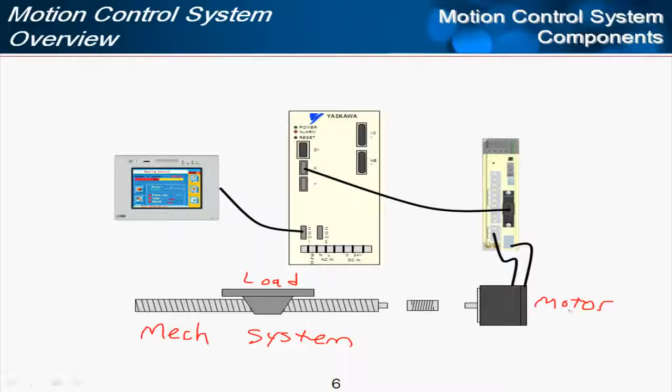The most important component in many aspects being that of the load, and what we'd call in this case a ball screw, a belt, any type of mechanical system. But the load can't move by itself. We have to have a motor, a servo motor in many cases. But the servo motor also can't move by itself. It has to be driven through a drive.

This servo drive is often referred to as the amplifier or amp. And Yaskawa has a name that we'll put on the front of ours called Servopack. So these terms are all synonymous in the motion world. You'll often hear the word servo, and the servo can be referring to the motor and drive, sometimes together or separate. And one common, you might call it mistake, is to call this drive the controller.

And in a sense it is controlling the motor, but the controller, or the logical controller, the PLC, is a separate system. And so I'll call this the controller. The drive just takes a command and makes the motor move as commanded. The controller is what makes the decisions and decides what that command should be.

Now, over the years, different manufacturers have done things to combine the controller and drive into one package, or to combine the drive and motor into one package. Yaskawa has done this. We've got an MP2600 IEC, which puts the controller together in one package with the drive. But really, no matter how you look at it, we still have these distinct components, whether they're in the same package or not.

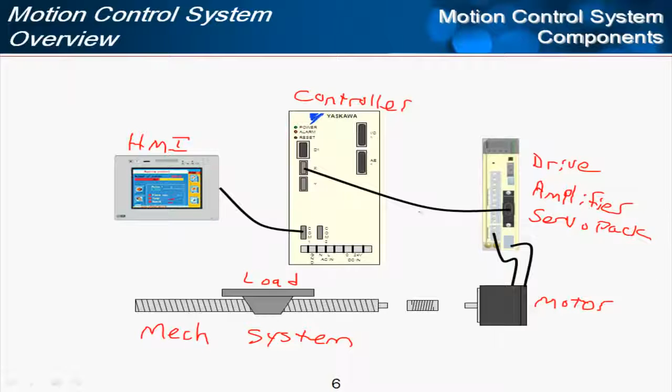And finally, here the user interface, we'll call the HMI, the human machine interface. And that could be a nice panel like this, or it could simply be switches and indicator lamps. And then this HMI is used to access and perhaps change different parameters in the controller so that the controller can change the way it commands motion to the drive and hence to the load.

So let's start by looking at the controller, because the controller selection often determines the setup and configuration of the drive system. The controller selection can be based on the programming environment, and that's one of the reasons that Yaskawa has moved to the IEC platform. It's an international standard programming environment.

Communication is also important, as there may be communication to other systems. Ethernet, DeviceNet, Modbus are some examples. The IEC series has a lot of communication here through both Mechatrolink and Ethernet. And the controller used also affects the servo control features, specifically the tuning algorithms, and then the type of command that's sent from the controller to the amplifier.

Again, using the case here of the IEC controller, we would be using the amplifiers in position mode so that we can take advantage of the Sigma 5's advanced tuning algorithms. And other types of controllers may use speed, position, or torque command, and then different levels of the Sigma 5 amplifier's tuning algorithms would be available.

Controllers also dictate the number of servo axes. One drive, motor, and load is considered to be an axis. And of course, price is important. Customer specification sometimes just dictates which controller will be used, and the manufacturer reputation, other non-technical criteria.

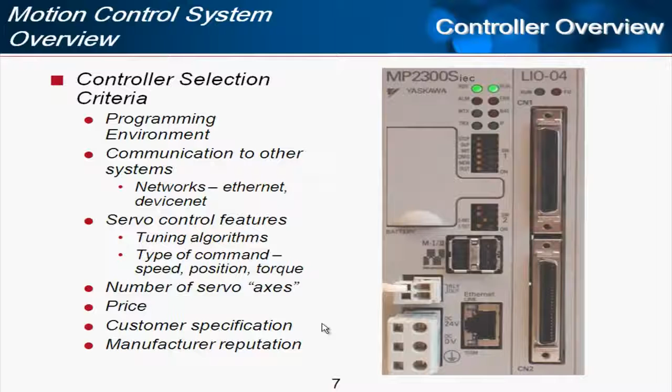Some of the controllers that Yaskawa offers are the MP2000 IEC family, that's down here. We have the MP2300S IEC, the MP2310 IEC, which has a little more built-in I/O capacity, and the MP2600 IEC, which is the one I was mentioning that's part of the amplifier all in one package.

There's also the MP2000 family, which uses a different programming platform and a different operating system, but is also very powerful and is capable of a very high axis count. In the case of the MP2200 here, up to 256 axes. 256 servo motors can be controlled by this controller. But Yaskawa also makes Sigma 5 amplifiers that are compatible with third-party vendors such as Galil, Delta Tau, Omron, and others.

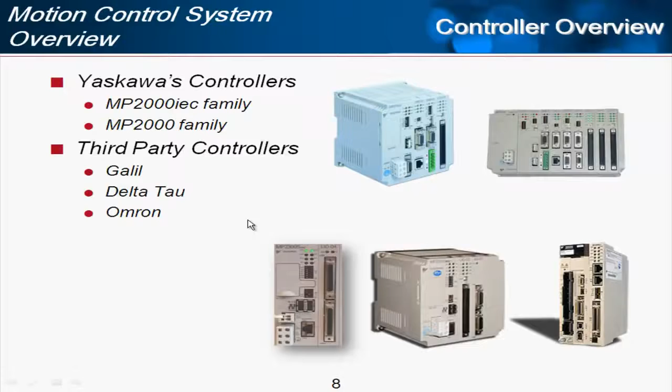And so whether it's network amplifiers or analog pulse amplifiers like we're showing here, the Sigma 5 can interface with just about any type of host controller, including motion controllers, CNCs, indexers, PLCs, you name it. We've got an amplifier that will interface with that controller.

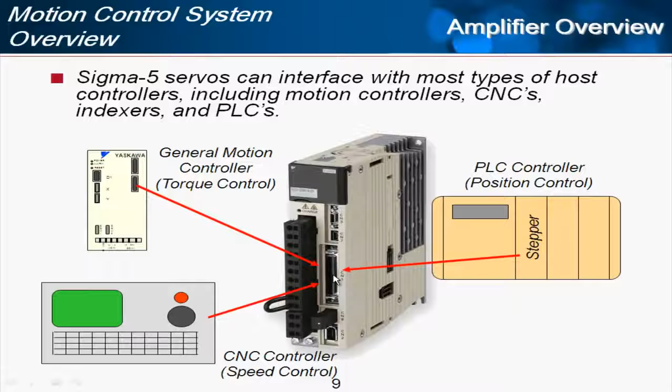And here we're showing an example of a controller, torque control mode. CNC controllers are many and varied, but in general they send a speed command, and so we call that speed control. And the most simple type of controller is often found in PLCs, where they'll just send a position command to the amplifier. This is very similar to a stepper motor, or as it shows here, a stepper card commanding a servo. So with all these controllers, torque, position, speed, we can always do positioning as a system. The question or the difference is just what type of command is being sent between controller and amplifier.

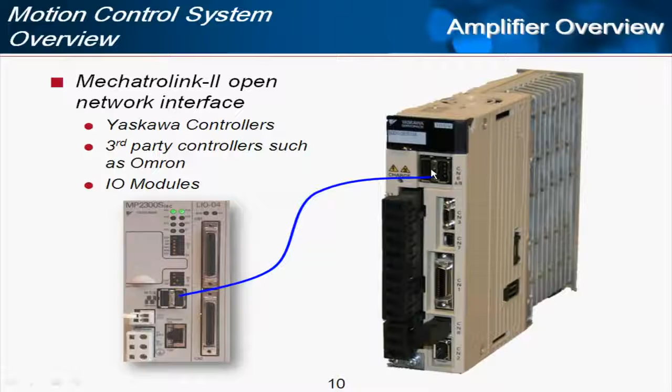A separate type of Sigma 5 amplifier is the MECHATROLINK-II. That's an open network interface, and Yaskawa uses that with our IEC and MP2000 series controllers. Other third-party controllers, such as Omron, also make controllers to run servos using this network. This MECHATROLINK network can also support I/O modules, and an example of those is the Phoenix bus coupler. So you can use any of the Phoenix I/O on the MECHATROLINK network as well.

Let's look next at the motor technology. Yaskawa offers 3 types of motor technology: rotary, linear motors, and direct drive motors. Rotary is the typical servo motor. When you think of a servo motor, I think of this rotary type.

And linear motors include 2 types. One type is the pre-built, pre-engineered Sigma Trac, where you just take the whole thing, order it to length, and plug in the cables and it runs. But we also sell component level linear motors. 3 types of linear motors: coreless, flat iron core, and T-type iron core, where you've got the magnet track sold in lengths and then the moving coil. You'd build up the system custom or perhaps even mounted straight to the machine.

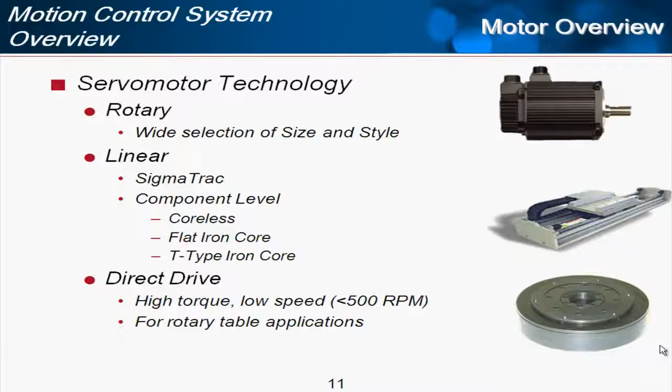And the third type of motor technology offered at Yaskawa is called direct drive, and it's especially designed with these mounting holes to mount a rotary table. So you can have a very large diameter rotary table on one of these small motors, and the motors don't go very fast. Just about 500 RPM is the fastest one. 300 to 500 RPM is about as fast as they go, but they really have high torque and high inertia, and so very good for rotary table applications. They have a very high resolution encoder. So those work out really well, and you don't have to have any additional gearboxes or other mechanical components as you would if you'd use the typical rotary motor.

Of all the motor technologies out there, why a servo motor? Why not an AC induction motor? Why not a simple universal motor like you have in a power tool? Well, servo motors are the most powerful for their size. You get the most torque and speed out of a servo motor compared to other technologies.

Servo motors also have very fast response. So if you try to turn the shaft of a motor that's well tuned, a servo motor, it's going to respond and hold that position very tightly. And also when you make it move, it stops, starts, changes speed very quickly. We're talking milliseconds of change time, not seconds. And so this really lends itself well to the motion industry, where we're trying to do motion repeatedly and shave off a few milliseconds here, a few milliseconds there to get the most output possible.

With a servo motor, you always have to have an encoder on the back, and that means you always need the amplifier. You don't run servo motors off the line power at constant speed. You need to have the servo drive, and so because of this, you always have a higher cost, especially compared to an induction motor with a VFD system. The amplifiers don't really cost any more for servo versus VFDs, but the motor is definitely more expensive. So you get what you pay for: millisecond response and very small package.

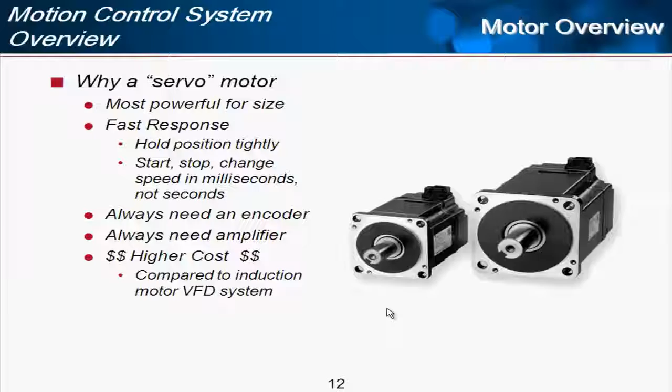Different options are available on many of the servo motors offered by Yaskawa. First of all is the voltage.

For Sigma 5 we have either the 200 volt motor or 400 volt motor. That doesn't mean that you can't run on 100 volts. It's just that the motor will run on 200 volt, and there are 100 volt amplifiers that run the 200 volt motors.

Another option are holding brakes, and that adds a piece to the end of the motor and allows the motor to hold its position even when the servo's off and you don't have any power. Especially good for vertical loads where the load could fall if it doesn't have something holding the shaft.

A motor seal is when you have a shaft seal so that chips and pieces of material, cutting fluid, etc., have no chance then of getting into the motor from the shaft side. The motor is very well sealed from the outside, but from the shaft that is an entry point unless you have the additional seal installed over the shaft. And so that's something you'd have to have installed at the factory, the shaft seal.

The absolute encoder is our standard option now with Sigma 5. And absolute encoder means that you don't have to home more than one time per install. Once you've homed the motor and have that position, that gets communicated up to the controller, and then the controller always knows where the motor is, and even if the power is off, the battery to the encoder is never off, and the encoder will effectively stay on at all times, and you'll always know then if the shaft is moved even with the machine power off.

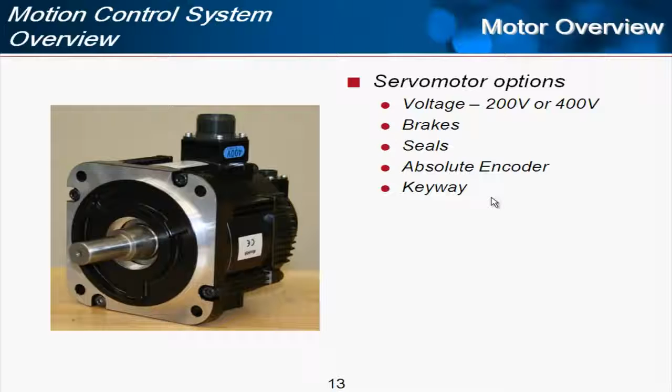The keyway is on the shaft itself. It's a little cutout, a little notch cut out of the shaft, and then when you install the servo motor and couple it to the machine, there's a mating keyway, and that does a lot to really ensure that the shaft cannot slip relative to the load. So keyway is an option, and if you don't need the keyway, most of the time you can have a shaft with a keyway anyway. It doesn't bother if you're using this compression type of coupling.

There are many performance specifications related to the servo motor, and just a few of them here as an overview I'm going to list. The first is torque, or in the case of a linear motor, force, and that's how hard the shaft can turn. In the case of this motor, more torque means more foot-pounds. Think of a wrench, and the amount of torque you can torque down a nut depends on how long the wrench is and how strong you are. And so by the same token, a servo motor has torque, and so there's a measure for that of how hard that shaft can turn. In the case of a linear motor, that's just a straight linear force.

When you think of a motor, you think of it turning, and that is a speed measured in RPM, revolutions per minute, of the shaft. And just to get a ballpark idea of how fast servo motors go, the Sigma 5 motors can go as fast as 6,000 RPM. The G series is one that has more torque but less speed, and those max out at around 3,000 RPM.

And a third very important specification for servo motors is the moment of inertia, and that's typically referred to by the letter J for inertia and M here for motor, the inertia of the motor. And moment of inertia is a measure of how difficult it is to accelerate the motor from stop due to its mass and its dimensions. So a general trend here is the greater the radius of the rotor inside, the spinning part, the greater the inertia will be. And then also the heavier that spinning part is, the greater the inertia will be. And so the equations of dynamics and physics are used to determine the moment of inertia of the rotor.

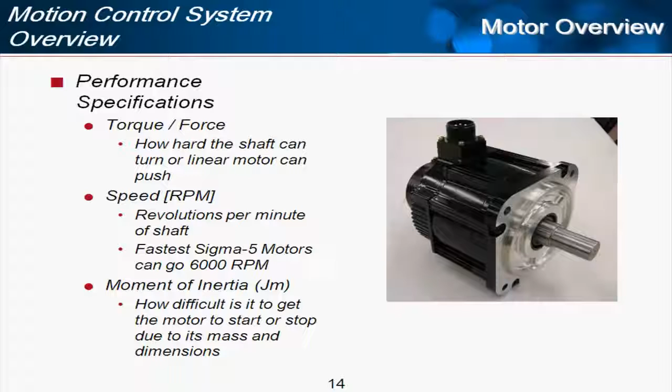And the moment of inertia is a very key measurement in the sizing of servos. We'd like to look at the comparison of the load's moment of inertia and the motor's moment of inertia and try to keep that within a certain range for certain types of applications that are very demanding. This concludes the motion control system overview.